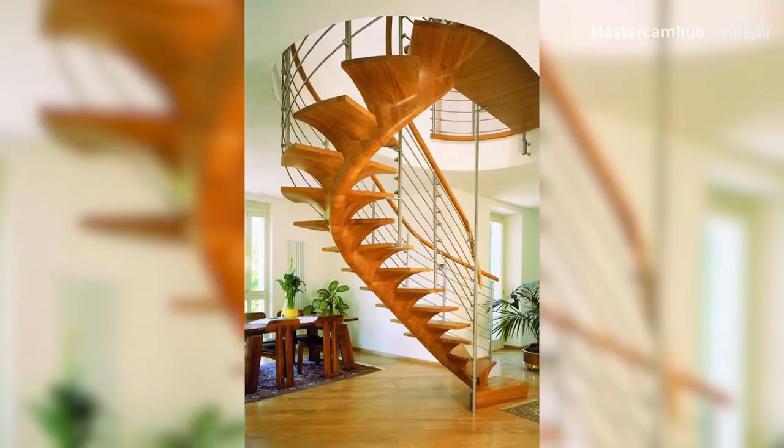Programming a CNC router, especially a large 5-axis router, can present some unique challenges, but this also means that there are some unique solutions you may not have thought of. So in this video, we're going to show you how to use the saw on your 5-axis router as a multi-axis roughing tool.

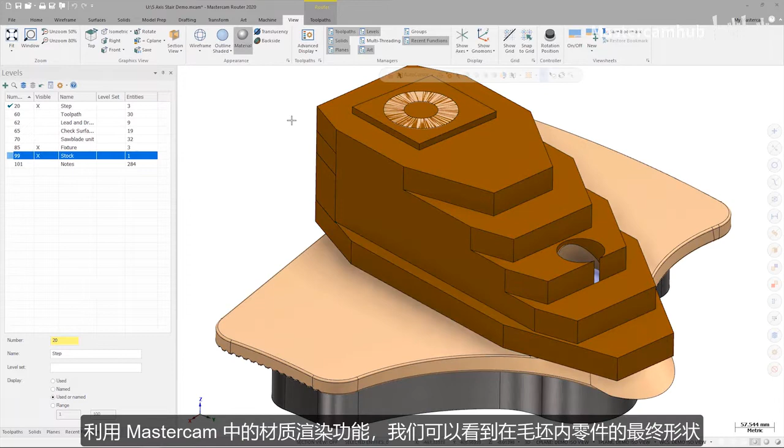The part we'll be working with for this demonstration is based on a stair tread from a custom spiral staircase. In this example, the top of the tread has already been completed, and a fixture has been created to hold the tread while the bottom's machined. Using section view, we can see how the fixture locates and holds the part to be cut. The stock for the rear of the tread is glued on after the top of the tread has already been machined. Utilizing the material rendering settings in Mastercam, we can see how the part geometry fits within the stock.

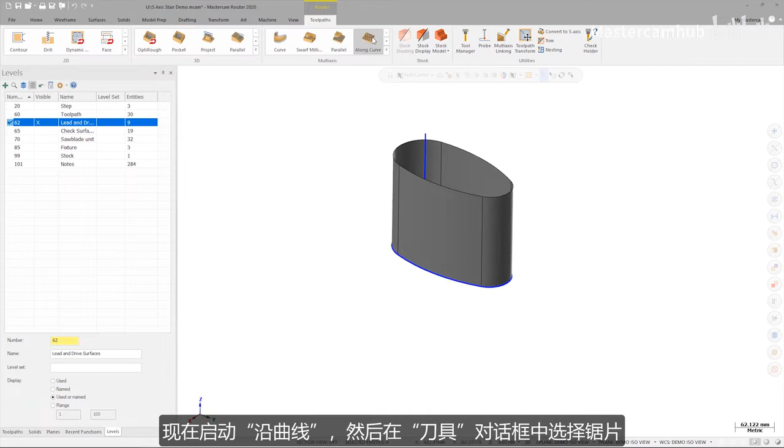An efficient multi-axis toolpath starts with having good drive geometry. Since we'll be using a multi-axis toolpath for this operation, we've created a simple line and surface for the toolpath to follow to ensure that the toolpath motion is clean. We'll now launch Along Curve, and on the Tool tab, select the saw. On the Cut Parameters page, select the line as the chain for the lead and the surfaces as the drive surfaces.

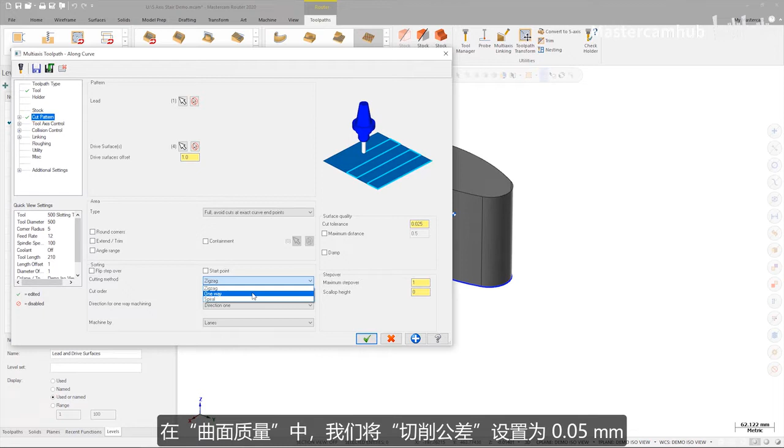Set the drive surface offset to 1 mm. In sorting, we'll set the cutting method to one way. In surface quality, we'll set the cut tolerance to 0.05 mm, and we'll set the maximum step over to 3 mm. The teeth on the saw we're using have a corner radius of 5 mm, so a 3 mm step over is going to minimize the cusps that need to be cleaned up later.

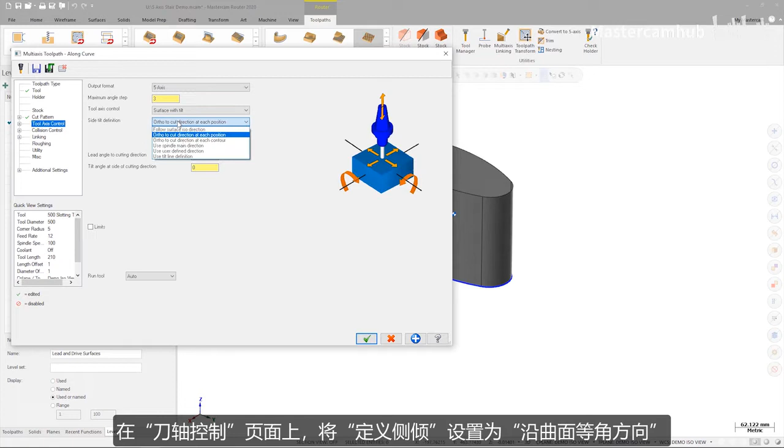On the tool axis control page, we need to set the side tilt definition to follow surface ISO direction. We'll also need to change the tilt angle at side of cutting direction as well. When the angle is set to 0 degrees, the axis of the spindle is normal to the surface. Since we're cutting with a saw, we need to set the angle to 90 degrees, so that way the saw itself is perpendicular to the surface.

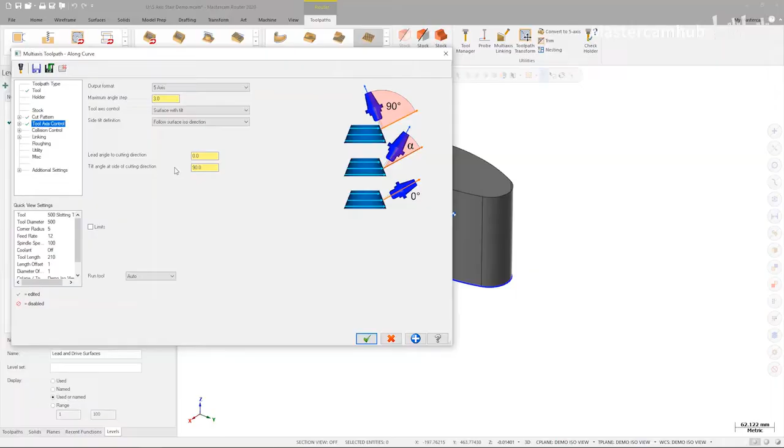We're not going to set any collision control options at this time either. Before worrying about collision control settings, it's more important to make sure that the toolpath motion is smooth and uniform. This is going to help make collision control easier to set up later when we do need it.

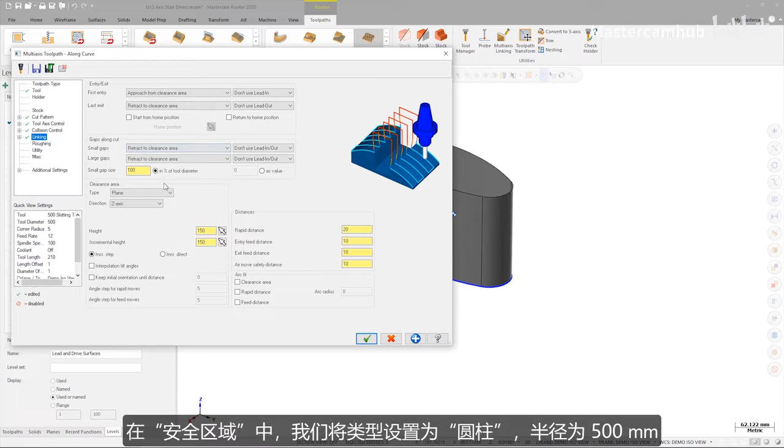So on the linking page under gaps along cut, we'll set the small gaps to retract the clearance area. And under clearance area, we're going to set the type to cylinder with a radius of 500 mm. We can now green check to close the toolpath dialog. And let's take a look at the toolpath so far.

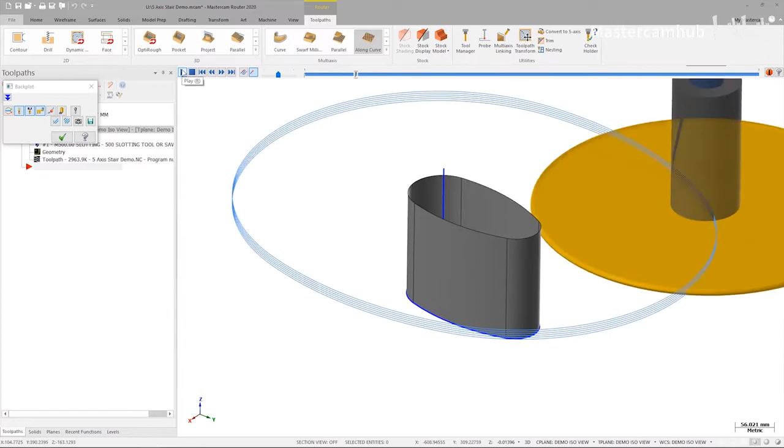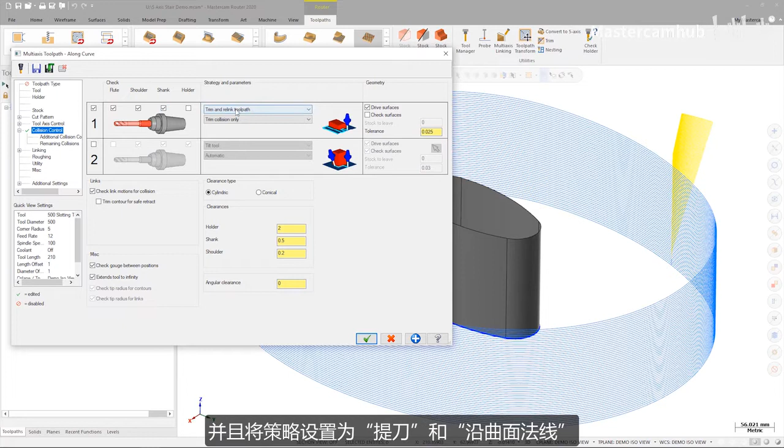Now that the toolpath has good, clean motion, it's time to apply that motion to the part itself. To do this, we're not going to change any of the drive geometry being used. Instead, we're going to use the check surfaces on the collision control page to offset the toolpath to the part itself. Now we're going to make sure that we have selected flute, shoulder, and shank, and that we set our strategy to retract tool along surface normal.

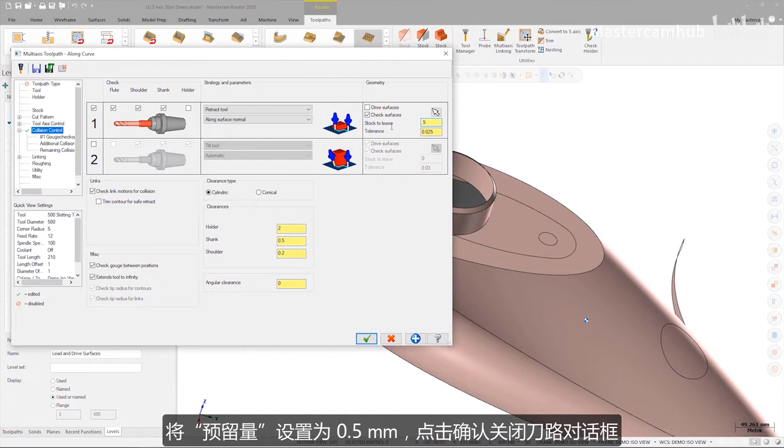Next, we'll set our check surfaces. We'll set our stock to leave at 0.5 mm and green check to close the toolpath dialog. Now let's generate the toolpath and see how it looks.

By creating simple drive geometry to control the motion of the tool, while using the check geometry to offset the toolpath to the part itself, we have a clean and uniform toolpath. Now, this is going to result in less NC and a smoother, faster toolpath to cut at the machine. But we're not done yet.

There's one more thing we need to take into consideration, and that's the tilt of the saw. If the saw remains parallel to the table of the machine during the entire cut, then when it gets to the bottom, the arbor of the saw might collide with the part before it's able to fully cut the selected geometry. But we can address this issue with one simple setting.

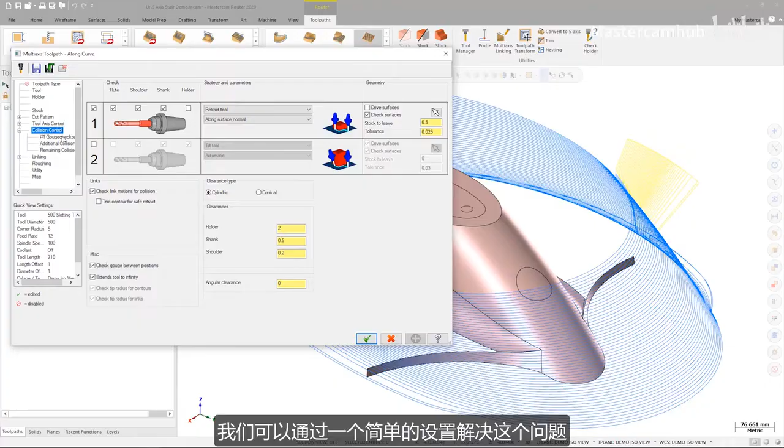Let's expand the tree for tool axis control and select the Advanced Options page. Set the gradual side tilt angle change to 10 degrees. Gradual tilt will slowly tilt the tool as it moves towards the end of the toolpath. By doing this, the saw will have enough tilt to cut the entire surface while keeping the arbor clear of the part. We can regenerate the toolpath one last time, and we'll launch machine simulation to see how the toolpath looks.